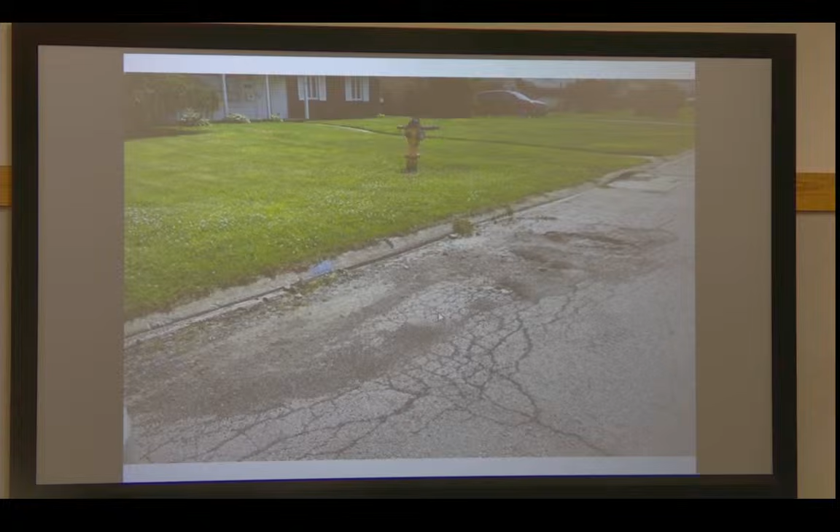Here's an example. This was last year when we resurfaced or reconstructed Eastmoreland South. This was the condition of the road—you can see the asphalt, and as it's peeling off you can start to see the underlying concrete, which, when they take the excavator bucket and scrape it, basically turns to stone. Here's another section where you can see the deterioration.

Here's a good example of another section where we just needed to do a small repair, but we've gone in and milled off the asphalt, and you can see the underlying concrete is completely shattered and in not good shape. That's why we need to do a total reconstruct—we can go in and try to repair this, but if you tried to resurface over it within a couple years, it would come right back.

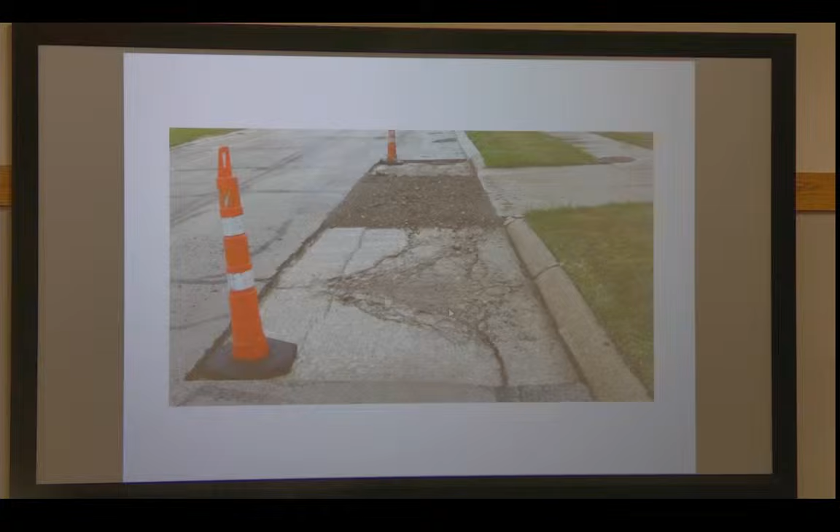So here's last year where they started ripping out the road. You can see it's basically concrete, and there's no stone base under the roads out there. This section of the city has a really sandy soil, unlike the rest of the city, and it has poor support—I don't know if that's why they selected concrete back in the day. But the problem now is it would be very difficult to put back a concrete road, and even doing that you still have to add stone and things like that, and it takes time.

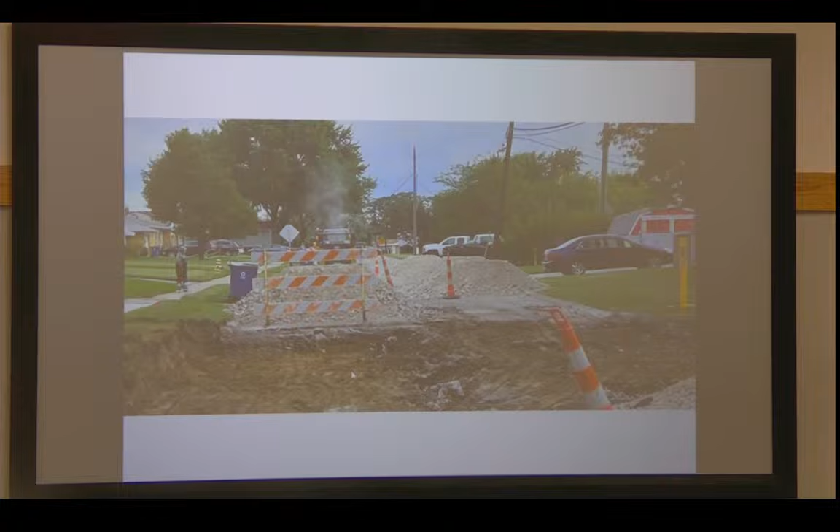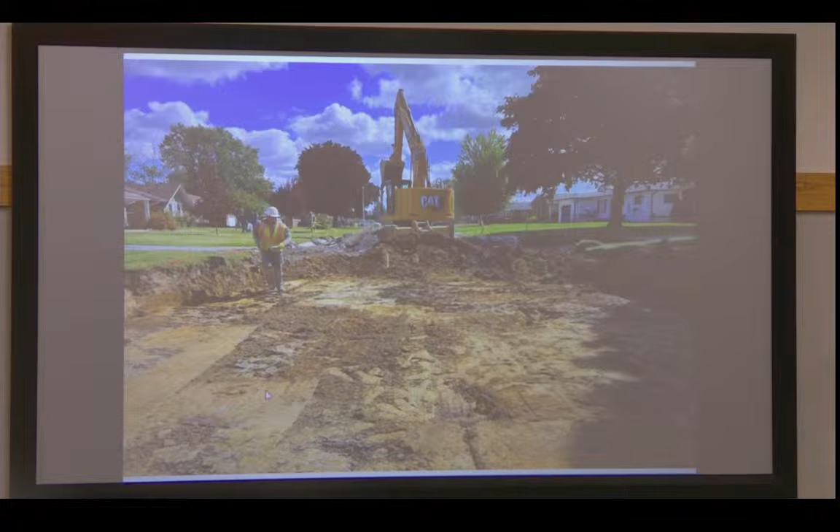So here's showing we go in and tear everything out. You can see that's not our normal clay—it's a very sandy, silty soil. They're prepping it. We use GeoGrid down to help spread the load out, because even with this soil you can keep digging and you're not going to get to a nice, solid, hard base. So it's a matter of figuring out how you can bridge it to get it constructed and put back together. The pipe you see out there are under-drains, so when moisture gets into the new road base, it has a place to get out and keeps the base dry.

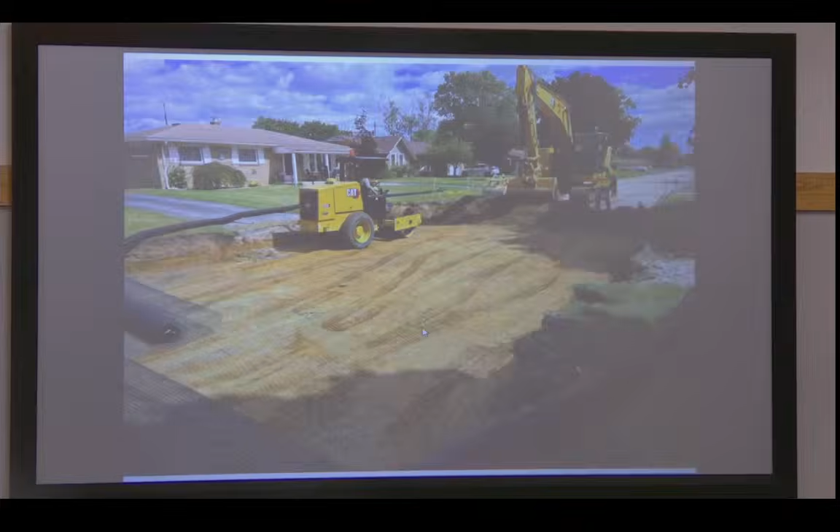Here you can see the GeoGrid being placed, the material there—a few more examples of that. Here, after the curbs have been placed, we have a layer of stone there, but still need to top it off.

On a lot of the older roads, you had downspouts and sump pumps coming through the curb line. Through the years, the street department would pave over about an inch and block half that flow. That water would seep underneath the asphalt, get into the concrete, and then freeze and thaw every winter. So that's what led to it.

So when we put in these under drains, we try to tie every one of those lines that were going through the curb right into the under drain. That's the way it's straightened out. Then we'll put a clean out in so you don't lose sight of where it's at, and you can always pop it to clean it right at that location.

When we're constructing this, we have the contractor tear out a section and get it stoned back in the same day to try to maintain access to the property owners. Last year I think maybe we did too good of a job providing notices, because William was out on a Friday handing out a notice, and one gentleman said, 'hey, I already know what you're doing,' threw the notice back, said 'you're giving me too many.' So I guess that's a good sign that we're communicating and people know what to expect.

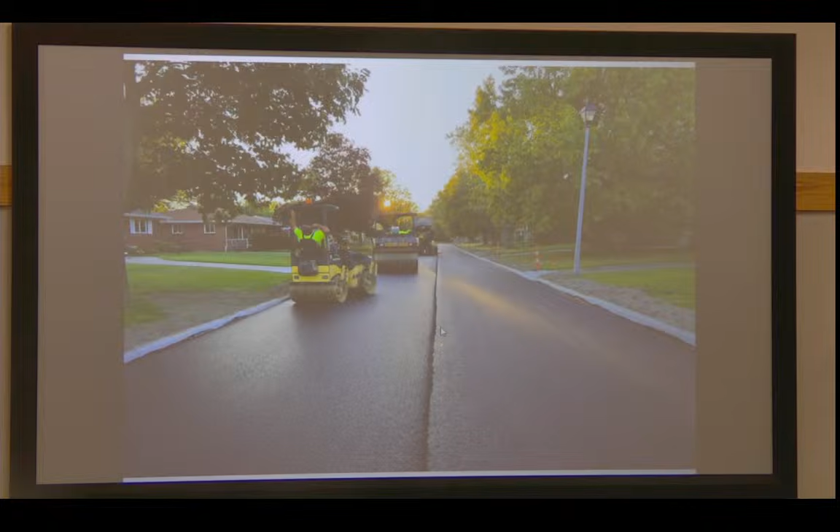Mr. Chairman, one thing I want to note, even on the conditions map, I noticed York Street had a serious condition. For a long time there, for the second power plant, we thought for sure they're gonna run a water line. They had an agreement to have Toledo run a water line over to just that plant, and we had an agreement between us, that developer, and the City of Toledo. I don't know if that's going to occur or not, but that's one of the reasons we didn't pave York Street, because of the fear that we're not gonna put in a new street and then have a new water line going in. Even with Toledo's project, they're gonna go into York Street, so that's why it's been left that way.

And in some cases, we may do that. If we're planning a water line or a storm sewer project, we may wait on the paving, just to get that underground work done first, that's all.

Mr. Chairman? Go ahead. Thank you, Mr. Chairman. Mr. Roman, is there any way that we can compel Toledo to redo York Street as a portion of their project, if they're going to be tearing it up?

Yeah, that's a good question. I think, Dennis, they do go through the intersection, but it's possible they're boring through all of that, just so you know. A lot of that is brand new. By the way, the York Street and Otter Creek Road intersection is actually pretty good, it's all concrete. It's just our section that's all asphalt. So it just depends if they're in our area. They would have to redo it if they were.

Okay, all right, thank you. Yeah, thank you, Mr. Chairman.

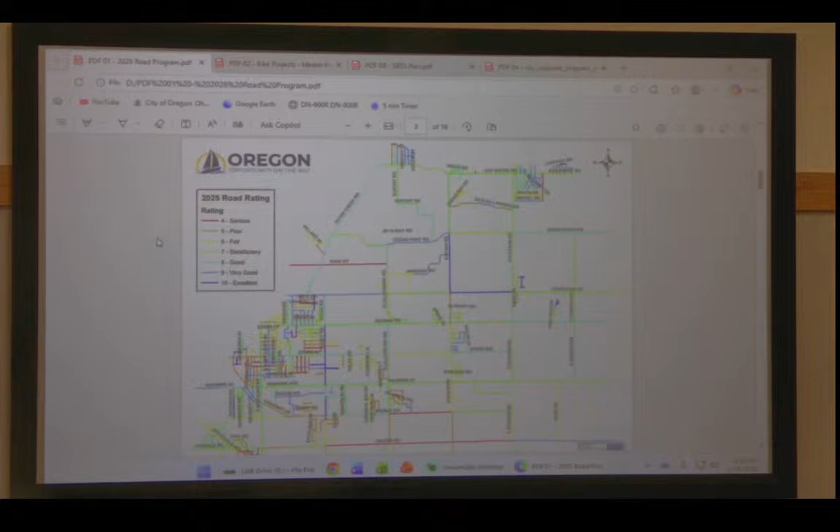We've had a lot of small projects over the years where we got grant funding to construct our bikeway network. The Oregon Bikeway program started in the early 90s with the Starr Avenue bike lanes, then in late 1999 we put in the bike path along Bayshore Road, and it just expanded from there.

Our goal was to connect Maumee Bay State Park to Pearson Park, going through our complex and the Starr Avenue bike lanes, which we have. Now we're focusing on the connectors to it, and that's where we completed the section of the Oregon Trail Bikeway from Starr Avenue down to Navarre last year. Prior to that, we connected it all the way down Brown Road from Pickle.

So the project we'll discuss tonight is the Oregon Trail Phase 5 project, which will connect from the Aldi's light into Town Center along Dustin Road. I've got a few more maps that show that.

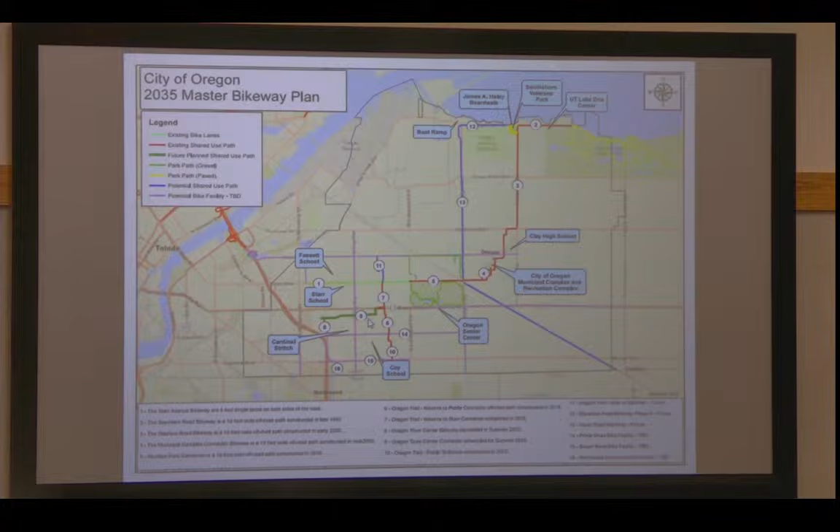We've had this master plan out there and have been working towards it over the years, basically the last 25 years. There was also a master plan developed between Oregon and Northwood to create a plan to try to connect both of our communities and expand a little bit. That plan was adopted by the city of Oregon.

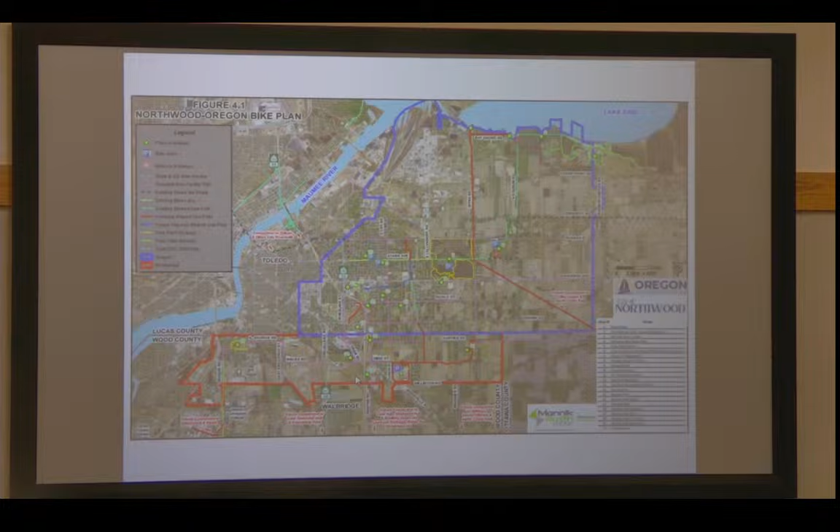Here is the plan, which incorporates our master plan into it, but then expands down into Wood County to show connections in Northwood, to tie into some of their parks and beyond. Just highlighting a couple things in that plan: it talks about some sort of facility along Wheeling Street, which we'll discuss in a bit, and also along Pickle Road, it talks about facilities as well.

Then just highlighting the Oregon Comprehensive Master Plan. Spread throughout it, there's a lot of language about connectivity, creating trails, those type of things. Mobility is highlighted quite a bit in the plan, trying to expand our trail network and make connectivity where we have gaps.

So just highlighting a lot of those things. There were about 1,000 people who responded to the survey, and a large percentage of them wanted to see these type of amenities and see more of them.

The other is in Town Center, the plan talked about walkability. With the development going on out there, I was really pushing to make sure they had sidewalks that connected to Navarre, a little bit wider sidewalk, which I really had to push to defend in between Chick-fil-A and Starbucks. Although it got squeezed down, we had to really push to maintain that connectivity and maintain access from Navarre back into the site, so that it will be very walkable.

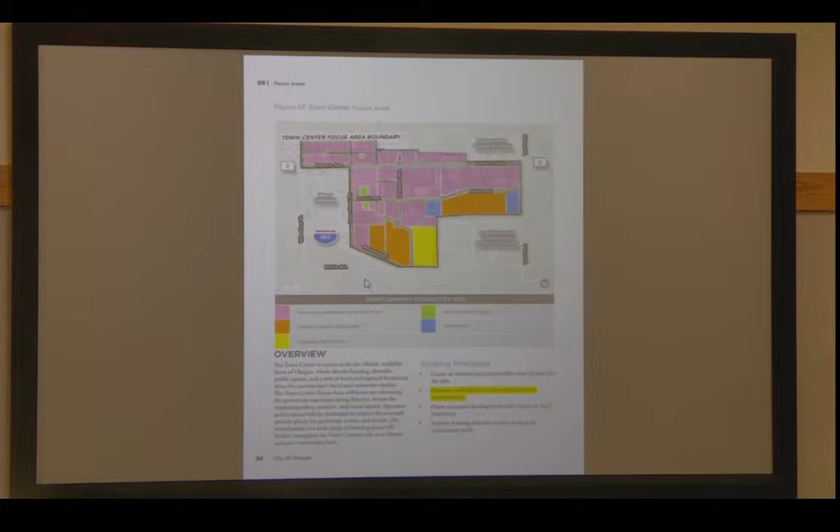So the project we'll be talking about is the Oregon Trail Phase 5 Bikeway Project, which originally the city was just going to fund with local funds. There was a round of transportation alternative funds through TMACOG that came out, so we decided to apply for a grant back in 2023, which City Council did authorize us to apply for.

That Phase 5 Bikeway project will basically replace the sidewalk along the south side of Dustin Road with a 10-foot wide concrete path. It also connects where there are gaps currently in that sidewalk, creating a continuous pedestrian path.

Then when it goes onto the east side of Coy Road, it uses an existing segment of roadway that's really just a dead end with only a couple houses, so very low volume. We'll create a small section of asphalt path, then use the section of Dustin at the dead end of Athens. Then it'll go behind, the city has a 25-foot right-of-way behind the houses on Warden, and the properties off of Navarre, there's a right-of-way through there that was the Dustin Road right-of-way essentially. We'll construct the path there, then once we get behind the houses on Schmidlin and up against the Dairy Depot property, it'll head north.

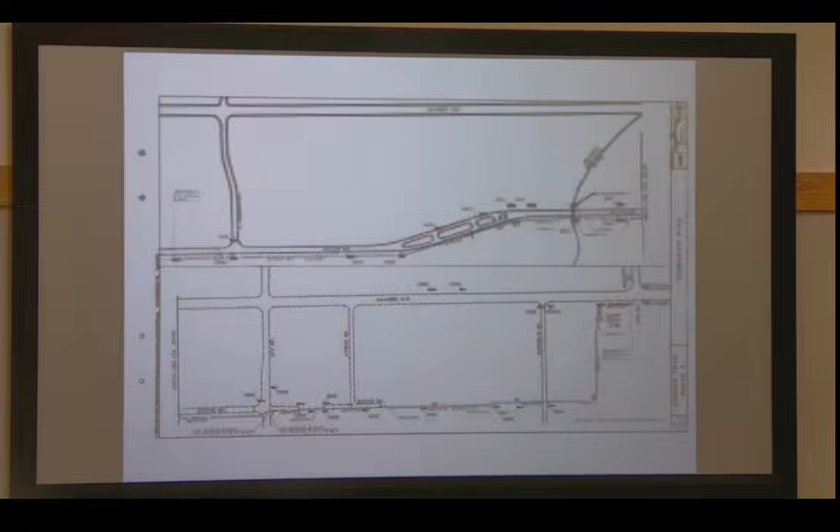So the other project that we'll be presenting tonight would be Wheeling Street. We were able to get grant funds. Basically this project is 100% funded for construction. Wheeling Street is a US bike route, and we were able to get funding to basically replace the existing 5-foot sidewalk with an 11-foot wide paved trail.

We've noticed that there's a lot of pedestrian and bike traffic. There's the apartments to the north, and to the south you have Myers and different things, so you have a lot of people that use that path. Also you have the Mountain View neighborhood right here. This will provide them with a connection and a trail connection that they really haven't had in that portion of the city. There are sidewalks along Pickle Road on both sides.

Currently, there's a sidewalk only on the west side. So it'll start down at the south corp limit and terminate right up at 280. And there's the yellow section here, an existing 8-foot concrete path that's going to remain. That was part of the hospital.

One thing I want to note is that Wheeling Street also is a truck route for TRC, and they are Michigan-loaded trucks. So it's odd that you have this US 30 route on Wheeling Street that at one time I don't know we were quite aware of it. Then we were made aware of it, and we're like, wow, we're going through it. So we thought, and I see it, I witness it a lot - I see a lot of people either in the grass or going around somebody walking on the sidewalk.

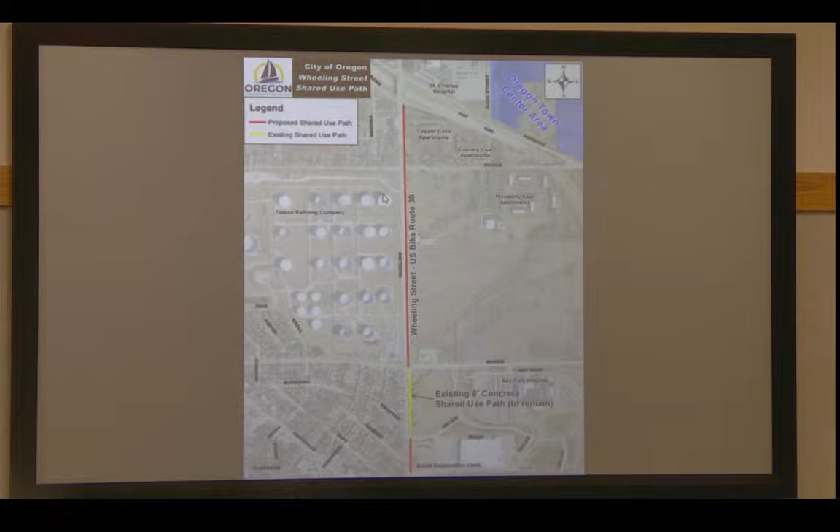So next, I wanted to talk about our Safe Routes to School program and give everybody a little bit of history. Safe Routes to School started back in 2005, that's when it was kind of created. ODOT created the program and rolled it out. They really didn't know, the feds wanted the money to get spent and wanted programs started.

So back in 2007, actually probably in 2006, the city and Oregon Schools teamed up and we wrote our own school travel plan, so that way we would be in a position to go after actual infrastructure funds when the first round of grants came out. This was back in September of '07, we wrote a plan and then actually submitted our application that year.

We were funded for the sidewalks along Starr Avenue, which would be from basically Coy School over to, I think that's Whittlesey or Berlin. If you remember back then, there were no sidewalks there. Kids would walk the bike lanes. It was very unsafe. And so this project got funded and we actually constructed it, which is kind of crazy when I was looking through the history.

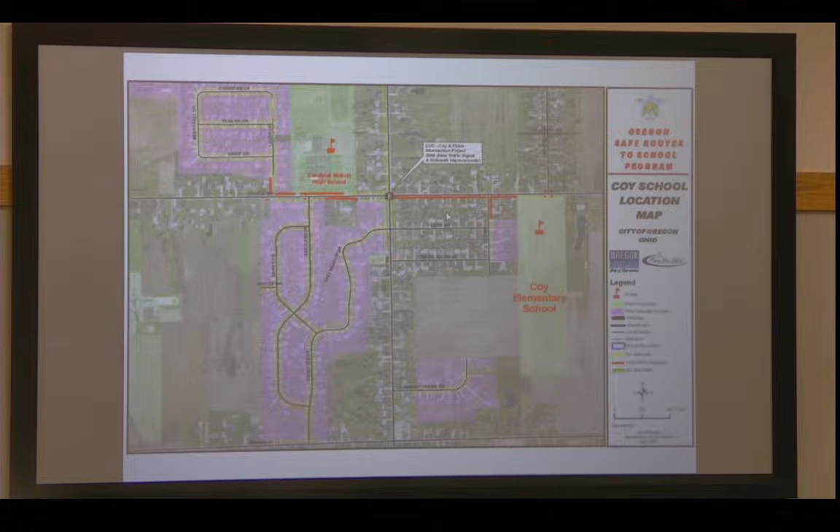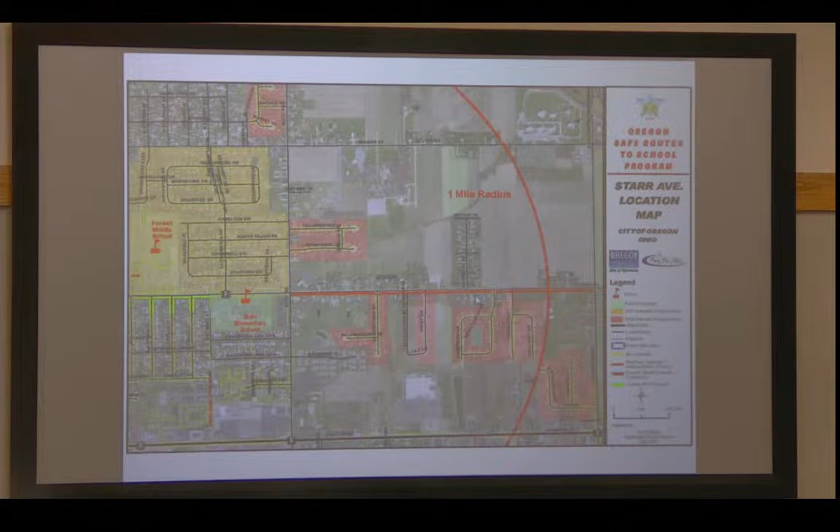But that project, if you're familiar with the section along Starr Avenue, it kind of meanders a bit, but we were mainly staying within the right-of-way. We had to go up and around different things, and drainage was also difficult for these projects, but it's been there and it functions. So that brings us to today.

In 2023, we decided we probably need to upgrade our travel plan, and we got approval through council to go after funds, or to have ODOT hire a consultant to update our travel plan. We were able to get funded for that, and Toole Design was the consultant that prepared it for us.

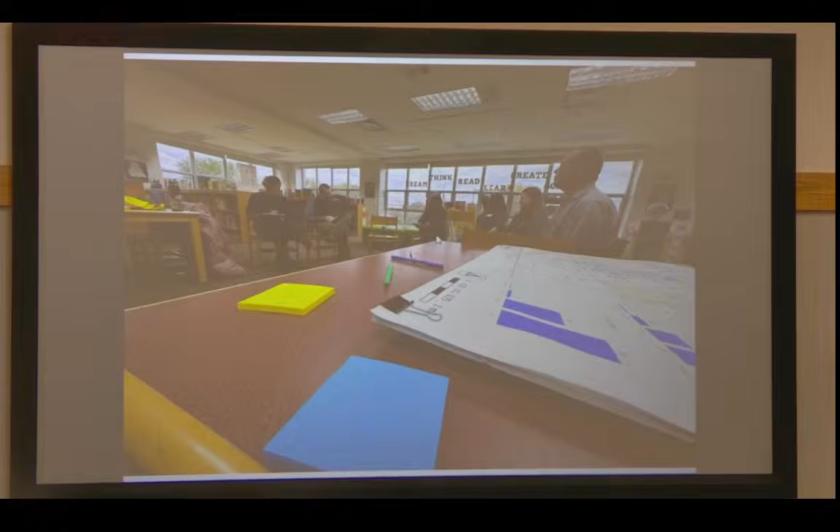Back in November of 2023, we had an open house at Coy School, inviting people in to give their input. Then, I think it might have been that same week, we went out and did walking audits in different areas. I believe Councilman Drake attended one of the walking audits. So we went out to help prepare the plan.

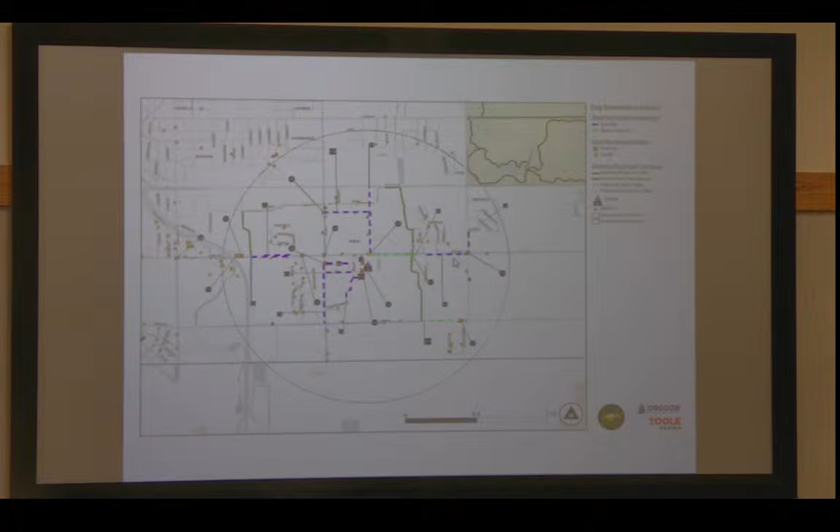Then there was another open house in February of 2024 to present the final plan and get last-minute input so we could finalize it. The school travel plan was prepared in March. This is the plan around Pickle Road, showing some additional sidewalks, paths, and things like that. The plan was adopted by City Council.

Then we requested City Council approval to go after funds for the next phase of Pickle Road, which we have been awarded. That's what's on the agenda for tonight — to enter into an LPA agreement with ODOT to accept those funds and move forward with that project.

So that project is basically installing sidewalks from Laura Lane over to the dog park, the Y driveway, on both the north and south sides. It'll also connect into town center, providing a nice connection to the existing apartments, giving them a path to walk to Coy School. I got an email from one of the new owners in town center asking if we could get a sidewalk connection, because her son has to walk to the bus stop and there's no sidewalk. So we've gotten quite a few requests for improvements to this section of Pickle Road.

Then the other section would be east of Coy School, from their property over to the existing bike path — looking at putting in a bike path there, and tying in the neighborhoods, making connections with sidewalks to connect to those existing facilities. So that's what that project entails.

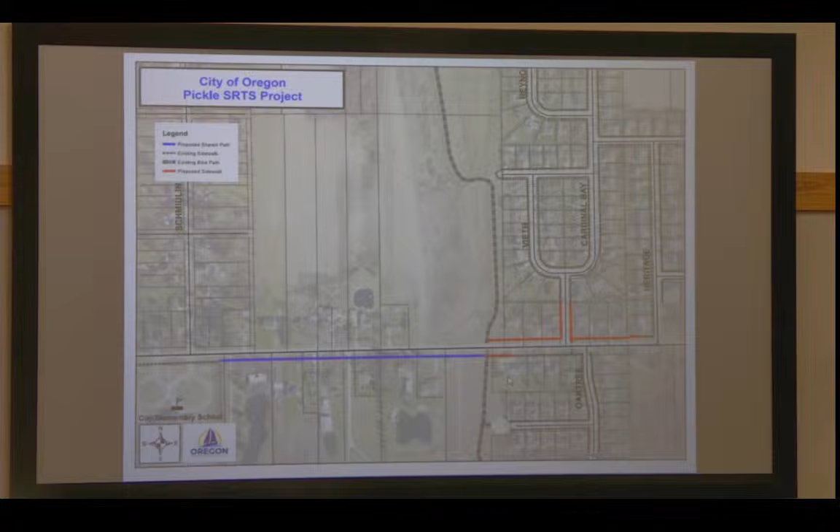This one sidewalk sticks in my head, and I want to know who put it there and how it got there. It's from Eastmoreland North, Eastmoreland South, and it goes all the way to Starr School, so all the kids in the neighborhood could walk in between these houses — it's not on the street, it goes right through the middle, from the apartments up to Starr Elementary.

Oh, so that was done years ago, when Yorktown went up? Yeah, that was done years ago. And they were the ones that put it in? I think probably when the development of the apartments came in, they put that in. Did they have to get permission from those homeowners? Yeah, I think it was part of that subdivision layout — it's in their plat map.

Those are great because they're off the street. Like Eden Park, we made them put in a path from their neighborhood to our complex here. They weren't happy with us, but yeah. So that's the reason why you really can't do more of it — it's hard, you've gotta buy right-of-way otherwise. But when you're doing the initial platting, that's when you make that argument.

And who's responsible for shoveling it? Well, that's another battle, because then it becomes the adjacent property owner who typically should handle it. Wow, I always wondered about that sidewalk — it'd be just like a regular sidewalk. Yeah, it goes right through the neighborhood. Thank you for that.

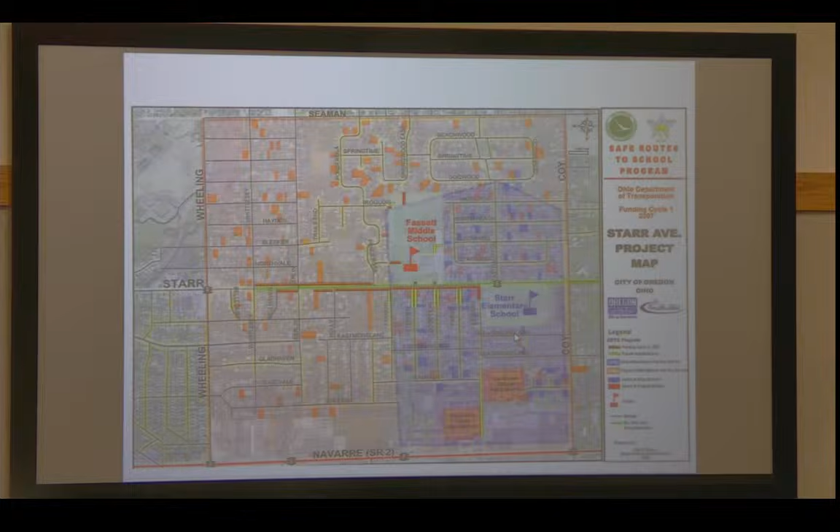Are there any plans for a sidewalk on Seaman here? Because I see a lot of high schoolers walking down the street, or they're in the grass or in the ditches.

As part of our Safe Routes to School plan, Clay High School was also evaluated. So we have a travel plan that does show sidewalks in a certain section. There's a section from the existing bike path over to Pearson Park, looking at possibly a trail on that section, kind of similar to what we're proposing here, a bike path out front.

Just to note, on all your east-west roads in Oregon, you always have more right-of-way on the south side. That's usually where your storm sewer's at, so you can usually do more there. On the north side, it's barely enough right-of-way for a water line. So if you're gonna do a path east-west, it's gonna be on the south side of a road. This complex would be a part of it as well.

There's always that debate of sidewalks versus a bike path. If we got the right-of-way, I think the preference may be a bike path, because the city takes maintenance of it, whereas sidewalks are typically assessed and the maintenance is on the property owner. On Pickle, we did get phone calls, and some weren't too thrilled about the bike path going into their yard, but when you think about sidewalks and the potential of assessing them someday, compared to not maintaining a bike path, they might like it then. It just depends. You got someone like Bill Myers who'd rather just have you widen the road and put in bike lanes.

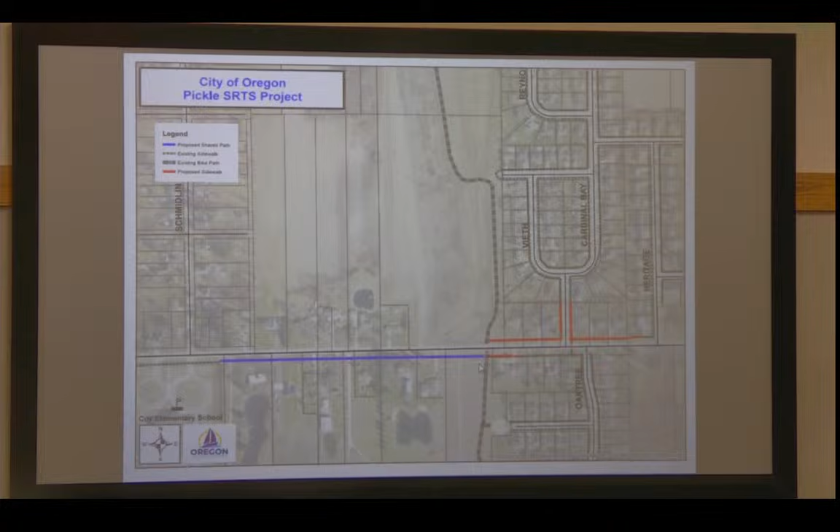All right, let's talk about sidewalks then while we got time. We'll have Andrea talk on that. I will talk about sidewalks, where we're at, where we've been, and where we need to go. Who has the clicker?

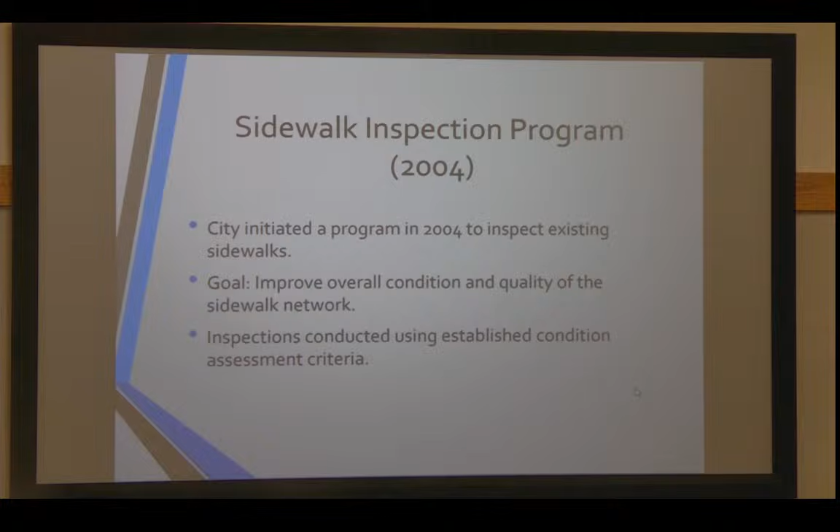The sidewalk program in the city of Oregon was originally initiated in 2004. Our original intent was to inspect the existing infrastructure throughout the city. That went on for many years, taking neighborhood by neighborhood and assessing. Once we conducted those inspections, we notified property owners of their responsibility to maintain their sidewalks. Some were not happy, but others made repairs. We were pretty generous in letting them make their own repairs or replacements. If they didn't want to do those on their own, once a timeframe expired, we then bid out the work and assessed each property owner for the work done on their property.

So I think over the years, our greatest assessment was maybe $2,500 on a large corner property that had quite a bit of sidewalk to do, and then we would assess it over 2 years on their property taxes. So in those years, we went through and made repairs. We did take on repairs if a sidewalk was damaged due to trees in the right-of-way, or maybe a manhole in the sidewalk — the city took on the burden of repairing those.

And we still do. I get calls weekly, monthly, on trees that have lifted sidewalks, and I continually inspect those. Last year, and again this year, we've had our street department attend to those. As we get a list of them, I pass those on to the street department for us to make those repairs. So at this point, about 2017, we finalized getting through the whole city.

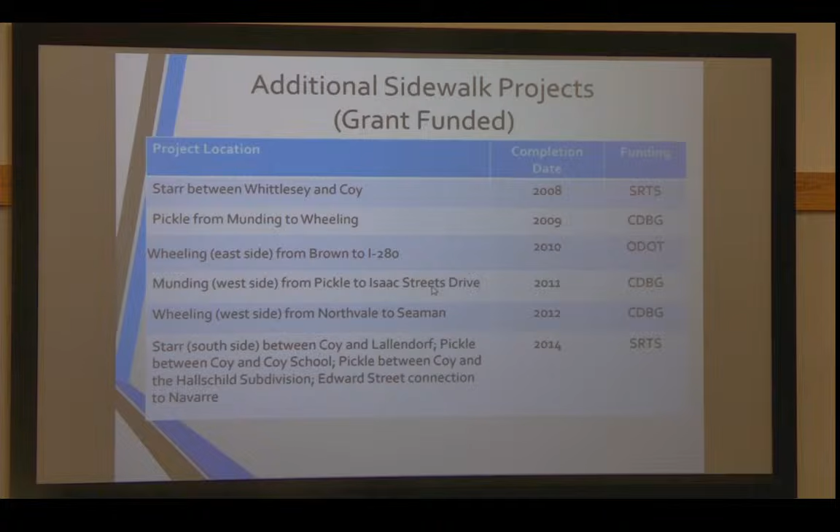We had additional projects that we completed with either a Community Development Block Grant or Safe Routes to School, and then ODOT. So you see a lot of our major routes were getting hit with grants when we could apply for those and qualify for them.

So again, now we're at that point where we are ready to revisit that second list — what do we do about these neighborhoods that maybe have 1 or 2 parcels that are not developed? I've highlighted eight maps, and I'll skim through them quickly.

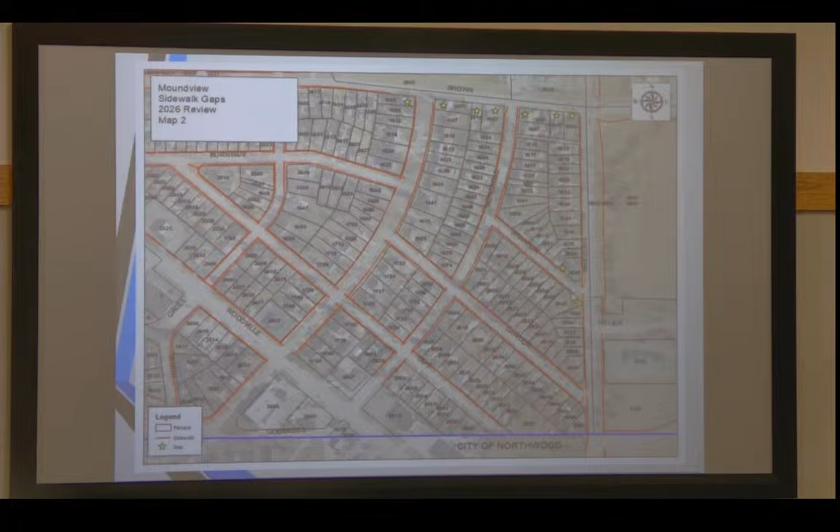Next is Moundview, and again we're talking about replacing this leg up here, but we still have one little gap we don't have access to with sidewalk. And here we had the funding to get Wheeling Street sidewalk in, however the funding wouldn't allow us to make this little connection. So we've got one little connection that we can't make.

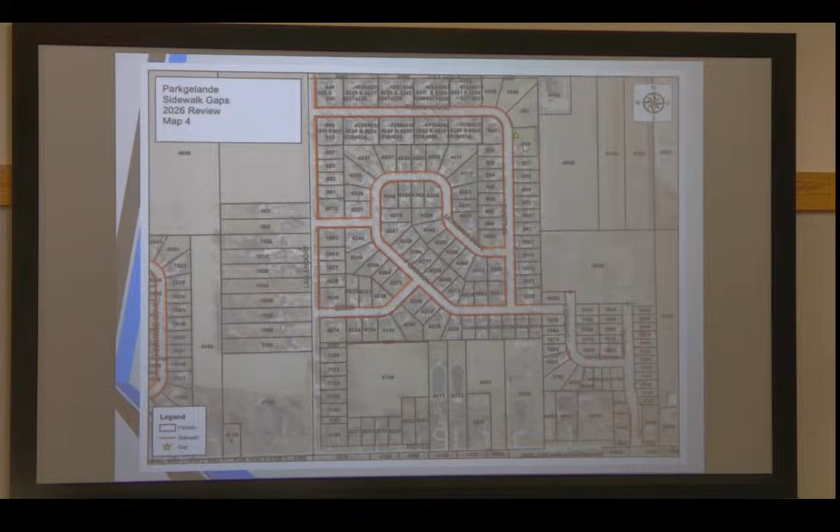Here's Springview — we've got a couple parcels. Parkgelande, half of a parcel — this is a combined parcel, but half of it doesn't have sidewalk. Laura Lane, one parcel. The Drake, one parcel. Eastwyck has a few more — these are all owned by the apartment owner, and they've been like this for quite a while, probably since the 70s. So you've got this neighborhood missing that connection.

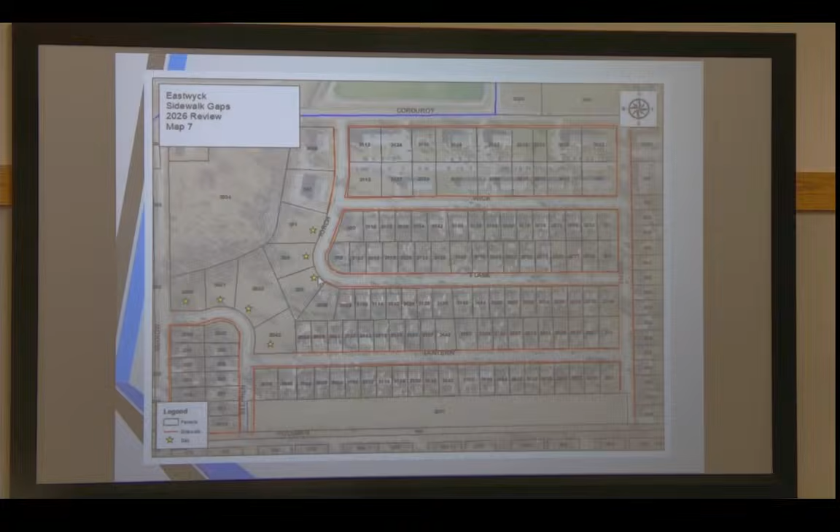So this is where we're at.

At some point, we need to have a conversation on how to address these. Typically, a sidewalk is put in by the property owner. So do we require this person to put in the sidewalk?

How do we really move forward with getting that last sidewalk in? One thing I want to note to council is that with newer subdivisions, we made a requirement that you have to put that sidewalk in. There's no debate, it's automatic. I think we give them 2 years from the day the subdivision's built, but the old subdivisions didn't have language like that.

So that's what you're dealing with. You have these older subdivisions where somebody bought a lot, they either put a garden on it or whatever else, and they have no plans to sell it, but people in the neighborhood are always complaining about it. Now the hard part is, either they volunteer to do it, which they're probably not going to, or the city council orders it in.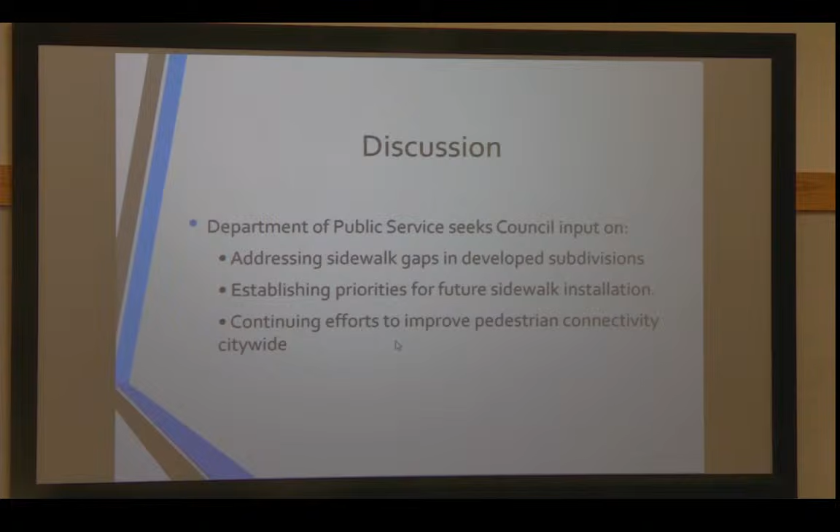I know there's a lot of people out there who've come to us, they'd be glad to show up and make their case for their neighborhood. But I do think it's something you need to think about, because in Eagles Landing, I talked to Mark Rigg, who was definitely involved with that subdivision, and they had some money collected where they could do perhaps the park areas. But as for doing everything, if it was a residential lot, that really should be assessed. And I agree with him on that. So I think it's a question of how far do we want to go with any one of these.

But I think it'd be worth it to put together a program that would include all of the gaps where the neighborhood is 98% developed. You can tell they're not going to sell the lot. We've always given them opportunity — if you're going to sell that lot in 2 years, actually develop it, give us proof of that. But if you're not, we're asking in 2 years you put that sidewalk in, or we'll order it in and assess it.

And if you want, you can give them more than 2 years — you can give them 5 years if you want, and just pay it back through the taxes. Paul, we do have a few of those parcels. We have made the request, sent a letter and just asked, do you have plans?

So there we're looking for just direction from council. Don't need to know tonight, but it'd be nice to know how you feel about it, because people do come and ask us all the time. The latest was Eagles Landing, but we've had them in the Drake. We've had them in a lot of places.

Thank you, Mr. Chairman. Is there any way we can get the engineer's estimate so that when we approach these neighbors, we can start looking at what the estimate would be for the linear foot for these sidewalks? I would guess the first approach should be an ask before we order it in.